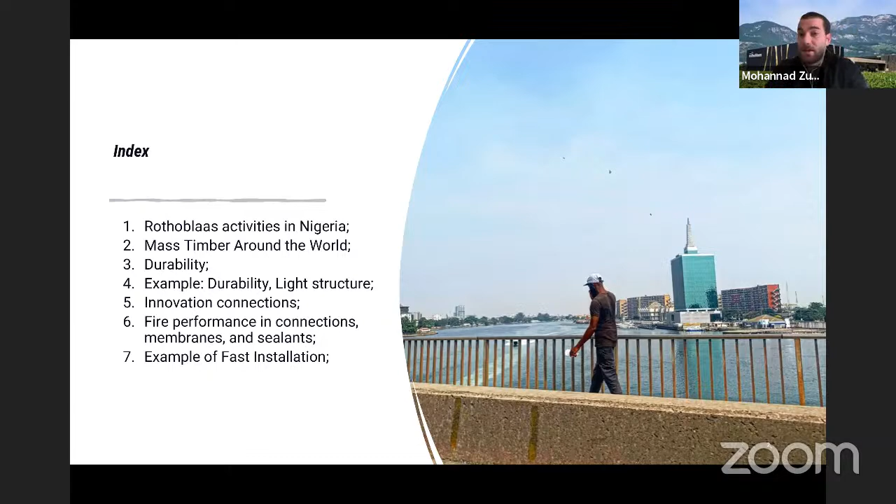First of all, we will go through Rothoblaas company and the activities that we are doing in Nigeria. Nigeria market for us is now a 2-year-old market. I have been in Nigeria 2 times, and I look forward to coming and visiting more during the coming months. Second, we'll talk about mass timber around the world, durability, and give some real examples regarding this durability topic in the hot climate or tropical climate region. Then we will mention a little bit about the connection and the fixation system, fire performance as well in connections, and sealants and membrane, with some examples, ones that are ongoing or done, or also according to our information, coming projects in Nigeria.

Starting with Rothoblaas company, it's a company with 33 years of working experience in the mass timber sector. We have worldwide subsidiaries. Our actions and our work is being close to the market. The last subsidiary we opened in Africa was last year in Morocco, and we are planning to open the next one in the UAE market. We have different locations with subsidiaries and warehouses as our strategy, being close to the market and supporting architects, engineers, and contractors.

33 years old, we develop, we don't only sell as a material, however, we do sell as well solutions, starting with machines and tools for carpenters, then implementing or including in our range fasteners, connections, membranes. In 2006, we went international, from Italy, where we are based, north of Italy, the Alps region, where the knowledge of mass timber technology started, and our developing was ongoing with the development of the sectors.

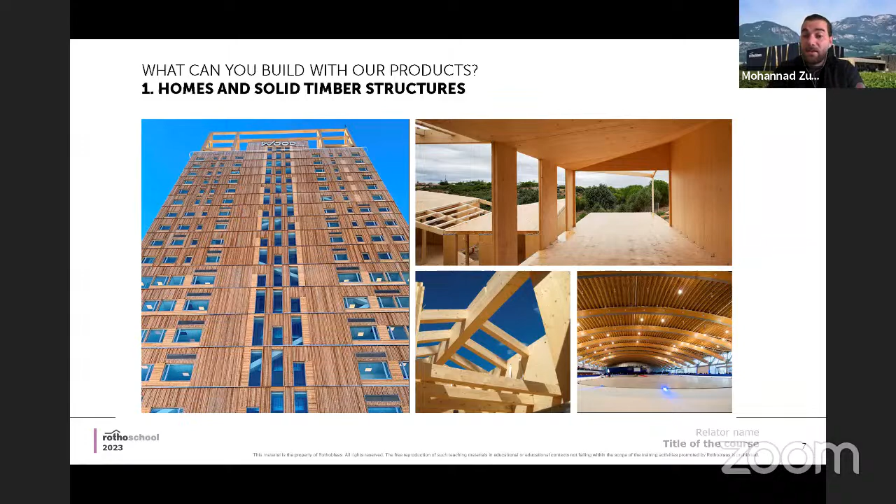Our products - mentioning that we don't sell the timber, we don't sell the glulam or the CLT. We collaborate with companies and engineers who build in CLT, and we support them, where you can find our materials in big buildings as well as in timber frame building systems, for example. And we have solutions for outdoor exterior, especially decking and cladding, pergolas, or related to timber work.

Currently, we are 300 salesmen worldwide. We look forward to be, in 2030, 600 salesmen, to be close to the customers and support them locally.

We do also promote mass timber, where we have a special line for educational purposes, which is called Rothoschool, where we make a lot of courses, even webinars, online, local in the market, or even we go to collaborate with universities. The last one was in Dubai last month, where we collaborated with a university and presented a course of 5-6 hours, and it was very successful.

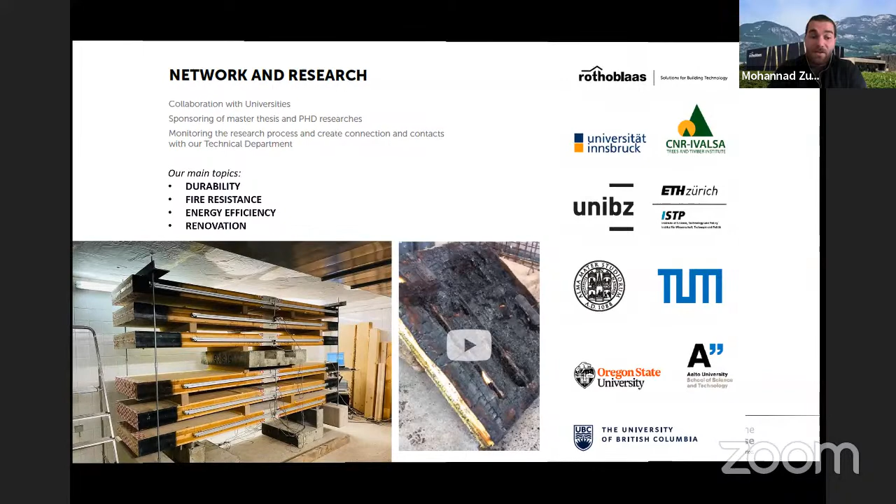As well with the research and university, main topics in mass timber, we talk about durability, fire resistance, energy, and renovations. Support, as I mentioned, we do support locally.

In case the customer needs help, we go to the construction site, we educate carpenters, we teach people how to use our materials, as well as we have a full team of engineers - 20 engineers just in the technical office in the headquarters, replying and answering questions from structural engineers, from architects, on what is the best way to use or to build in mass timber.

Talking about a different topic here, this is a very nice map where I always like to share it, where is the route of the CLT supplying worldwide, where we can see mainly coming from Europe and also North America, and it reached to the Far East Asia.

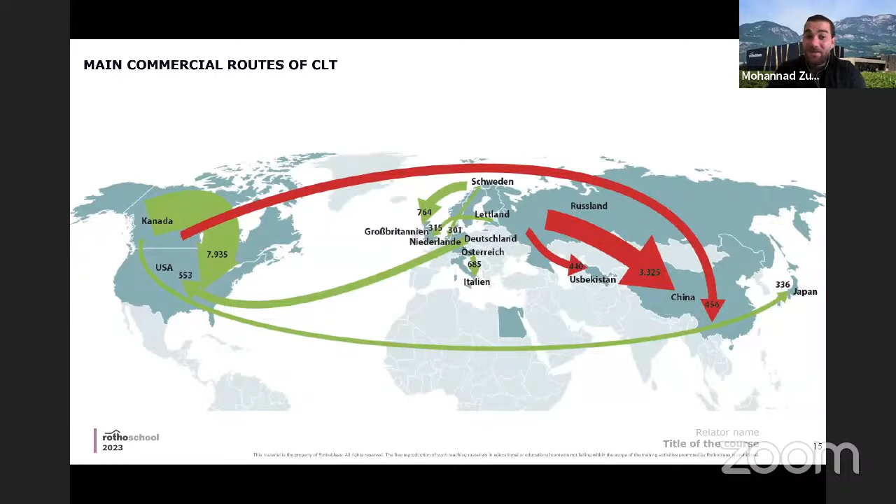From this map, I see this material is not passing Africa, which is currently the situation, unfortunately. However, this definitely will be changing.

Checking how close Nigeria, Lagos port is from Genoa here as an example - I was surprised it is 18 days, 20 days. However, where we did the projects in the Middle East, it used to take port to port 25 or 30 days for delivery.

So as well, seeing Nigeria's market is very close to where the material is, as well as knowing that currently Nigeria is working in forest management, this topic is something very interesting to consider.

The development of mass timber worldwide, especially after 2020, we see the exponential increment of using mass timber and implementing it as a building material alongside steel and concrete. So we do believe this sector will go further and further more as a percentage of use.

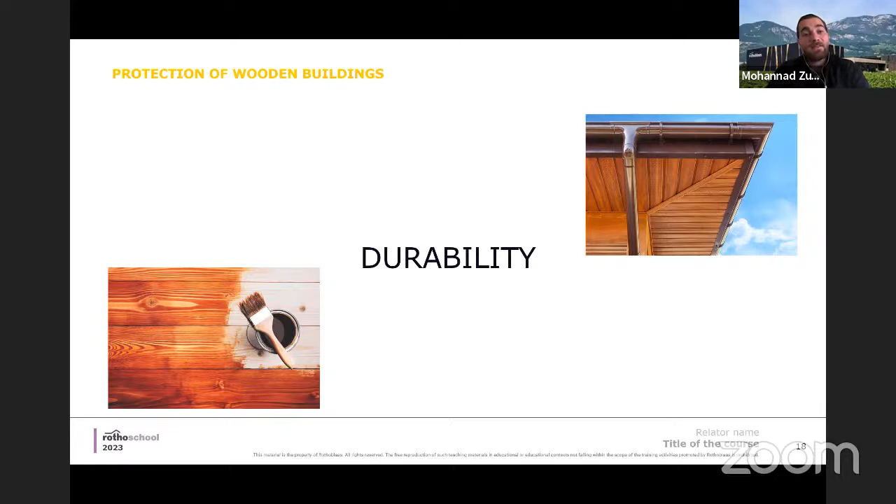Starting here with a topic that I would like to share as well, and the concern related to this topic: the durability of mass timber regarding hot climate weather, for example, that is material made. I hear a lot of feedback - this material can only be used in Europe, where is the snow, where is the rain. It is very hot weather, we cannot use timber.

Starting, I would like to begin with the principle of building physics - what things that we study during building, from the architect's point of view, which is the temperature, the air inside the building, the vapor generated. What is the temperature that a human being needs to feel comfortable sitting inside the building, which is, for example, from 20 to 27.

So there are many factors here that affect the building envelope, which are the external factors, as mentioned - temperature, wind, rain, water, vapor, or wood worms - and how we can protect our building, what material we need to use to make it more resistant and durable, as well as thermal comfort.

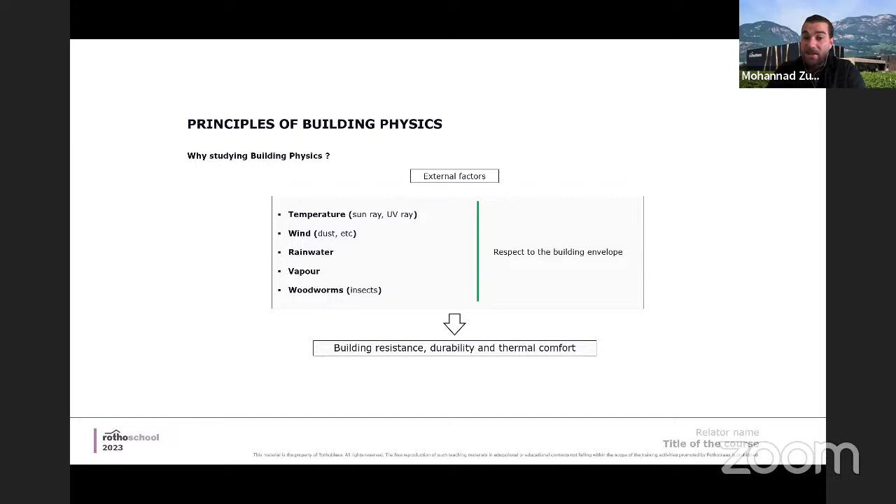Other things that are also considered, having all these environmental effects on the envelope of the building: our building is affected by superficial condensation and interstitial condensation. Both of them harm. The superficial condensation harms the health, especially during the winter, where mold starts in some corners of our room or around the windows, and you start smelling gases that will affect our health. And the one that is related to the structure we don't see, unfortunately, and how we should consider it during the design phase.

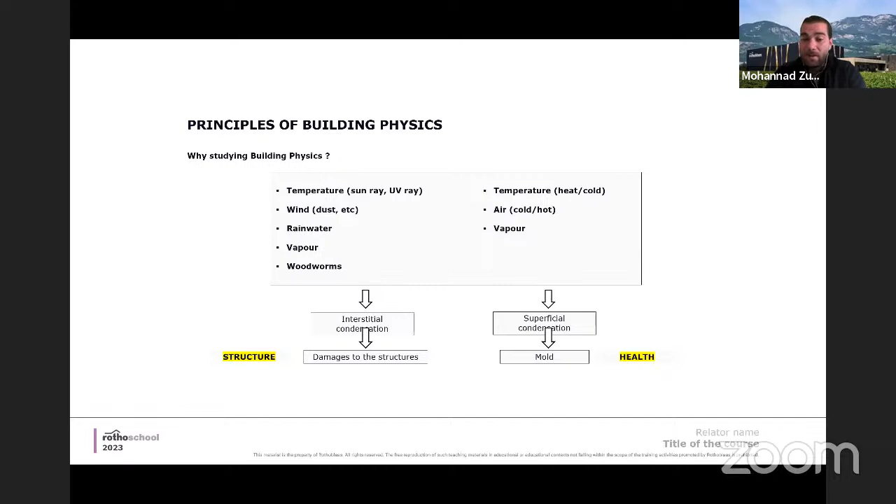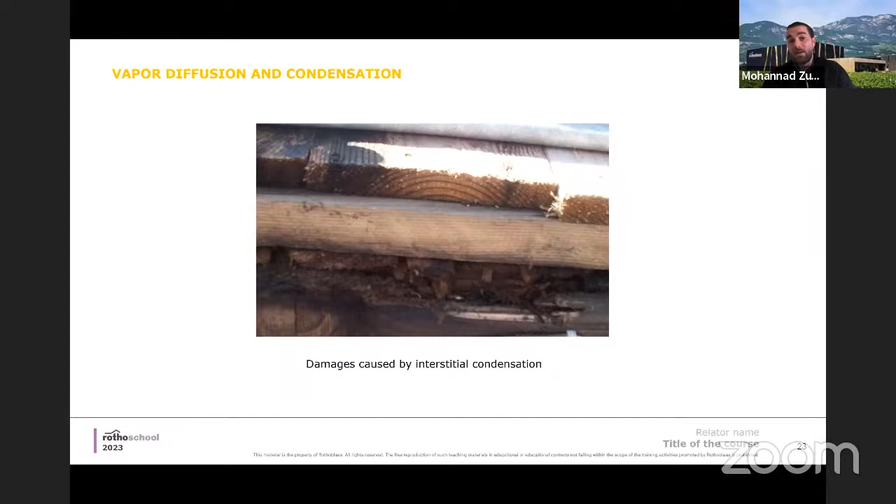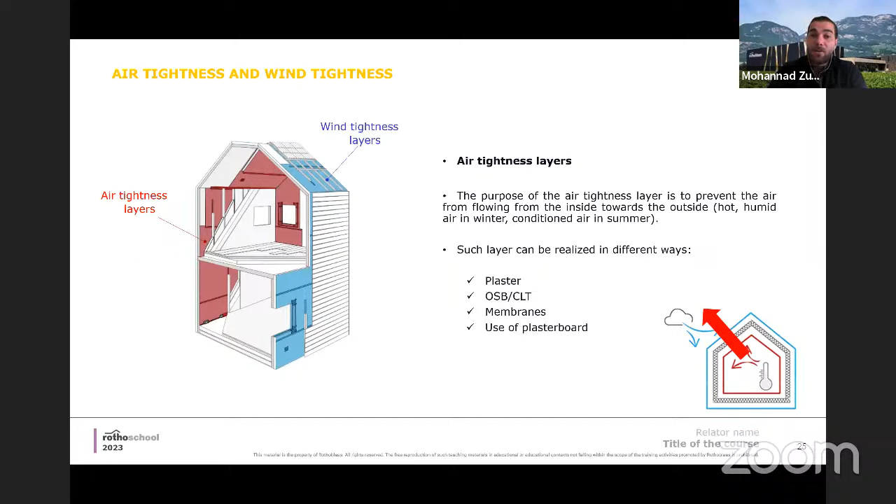When we are talking about tightness, here we talk about airtightness layers as well as the wind tightness layer. Both of them are important, differing with the location where we build. For example, if we build in Europe where there is a lot of snow, we need to make more consideration for certain layers. If we are building in a tropical or warm area, different layers could be considered. However, it is very important that we don't allow the vapor to go from inside into our structures, and at the same time allow it to go out of our structure.

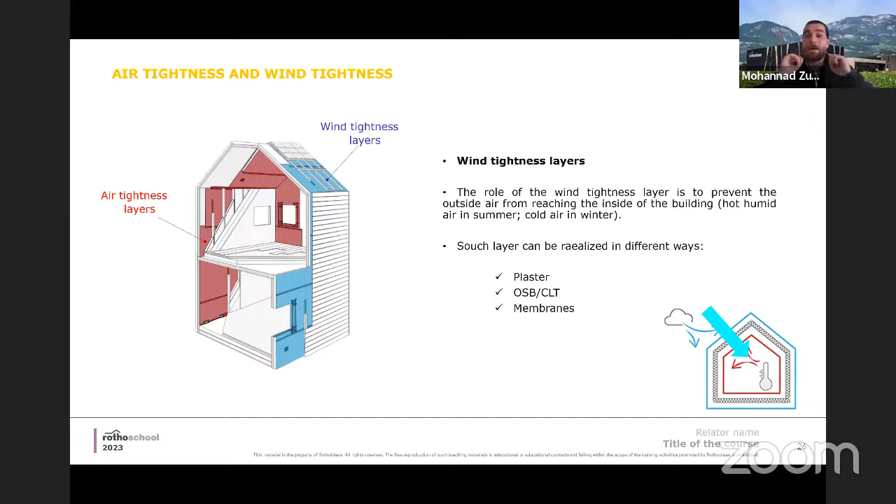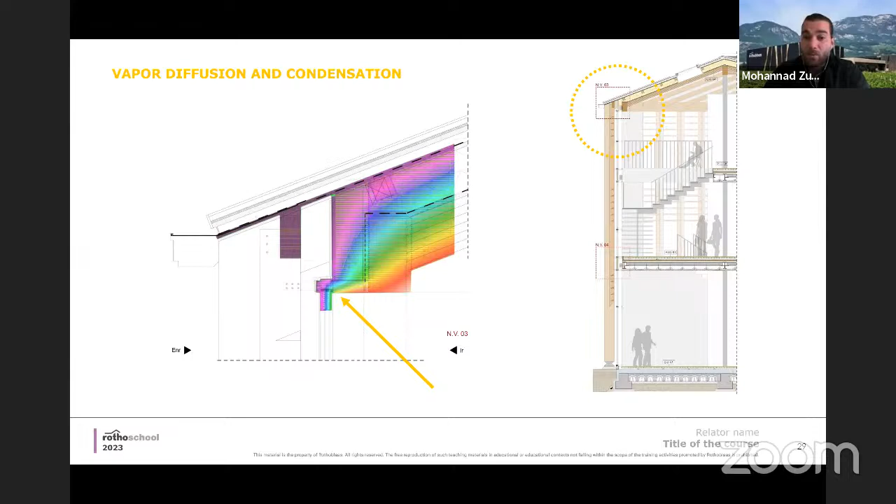On the other hand, wind tightness: we don't want to be sitting inside the room and feel the air leakage going around, and the vapor diffusion and condensation happening during the building life are important to consider. Here, an example of a bridge: small corners for the windows and doors, or with the slabs, the small details also need to be considered. How do we make sure our building is correctly airtight and wind-tight?

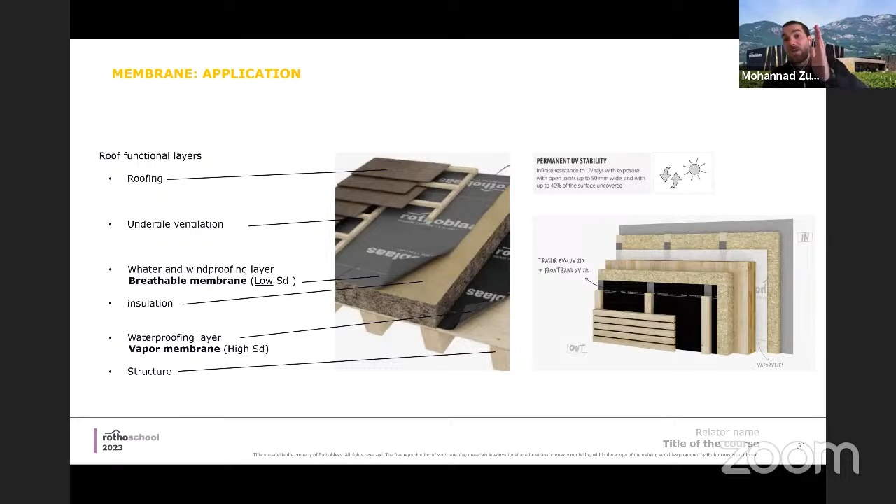There are two different types of membrane that we propose, the microporous membrane and the monolithic membrane, and each one has a specification depending on the application and the timing of installation. Is it for the wall? Is it for the roof? These small details are also very important to consider. Here is an example of roofing material. We put a breathable membrane outside with a gap, for example, of 5 or 8 centimeters to allow ventilation. For our roof and walls it is important to have ventilation, as well as a membrane to allow the vapor to leave our structures.

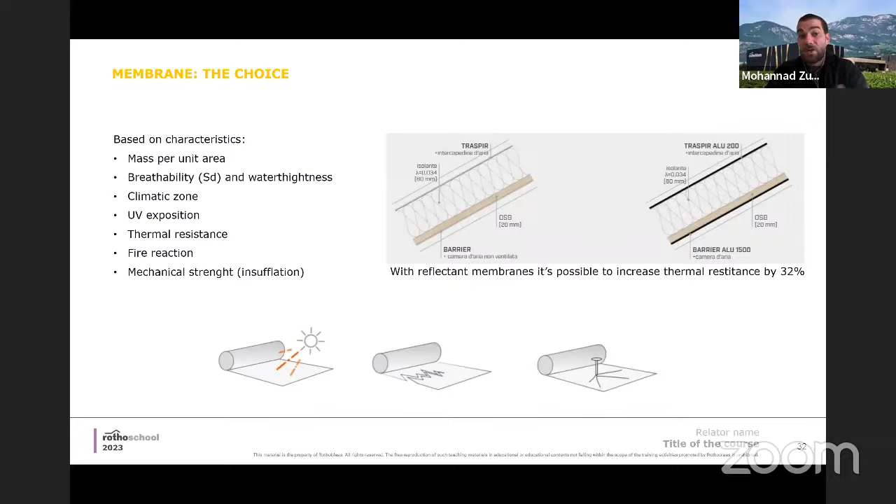Also important to consider is the mass per unit area, the climate zone, the UV exposure, for example, how long my membrane will be exposed outside before I cover it. Do I have a fire requirement? Then I need to use a certain type of membrane that we will see after. There is a wide range of materials that can be considered. It depends on the architect's specifications and requirements, and each one has its application and location.

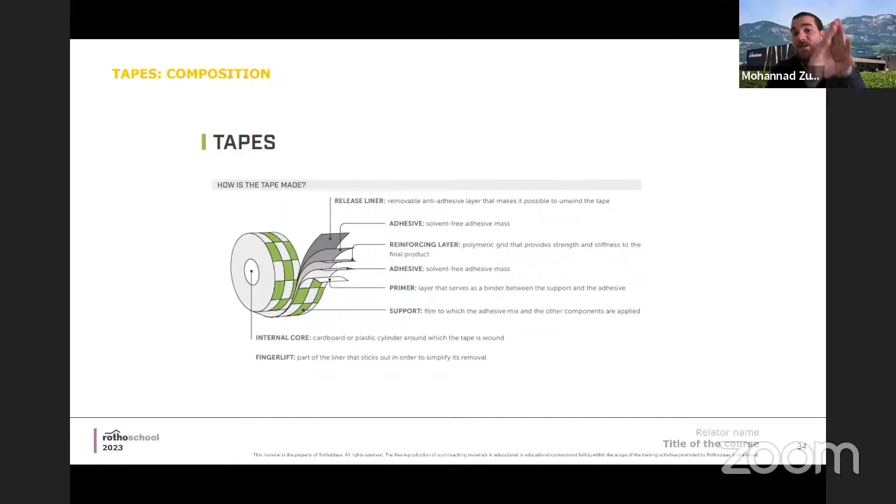Talking about membranes as well, we need a tape to join the membrane, to close the gap. The thing is, in mass timber, we put wood on wood, and there will always be a gap for air leakage. So how do we seal this connection or joint? We also need to consider the type of tape, the viscosity, the cohesion with the structure, the adhesive, and the stability over time. All this is to be considered, the durability as well.

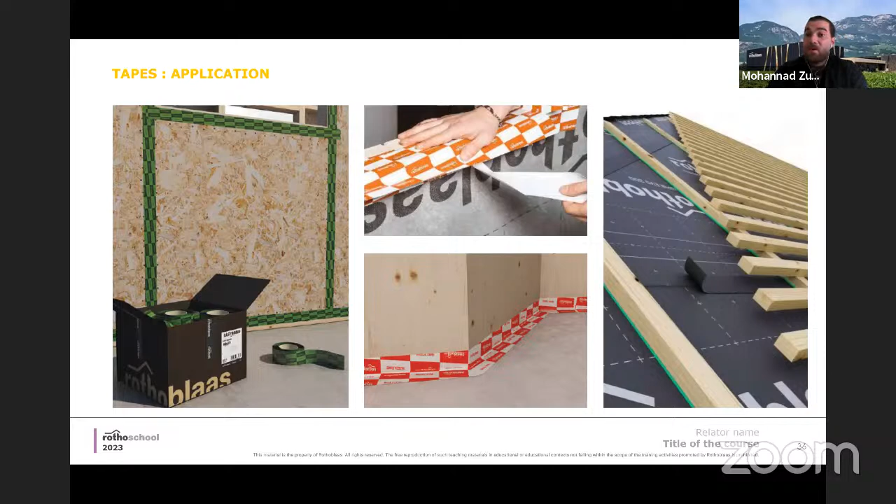This is an example when we are talking about mass timber. It's not only structural; it's very important to protect the structure of the mass timber, and there are materials that allow you to protect it and keep your structure durable for the design lifetime. Types of sealants for closing joints and openings.

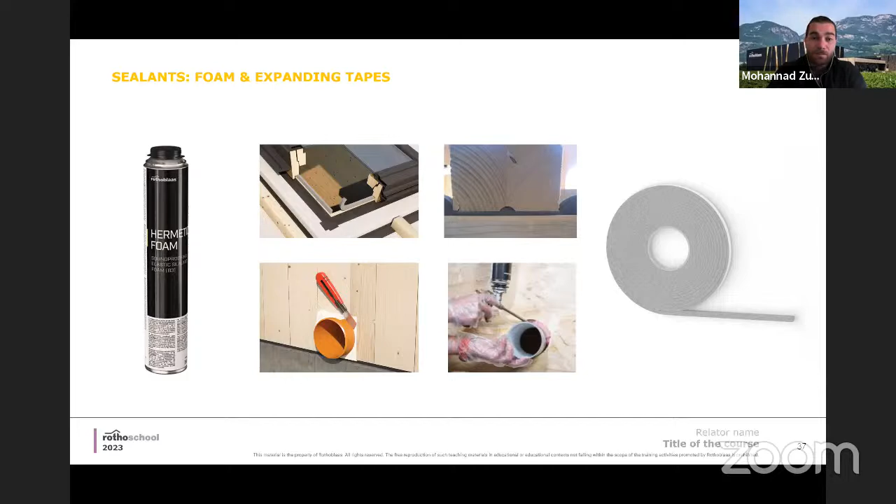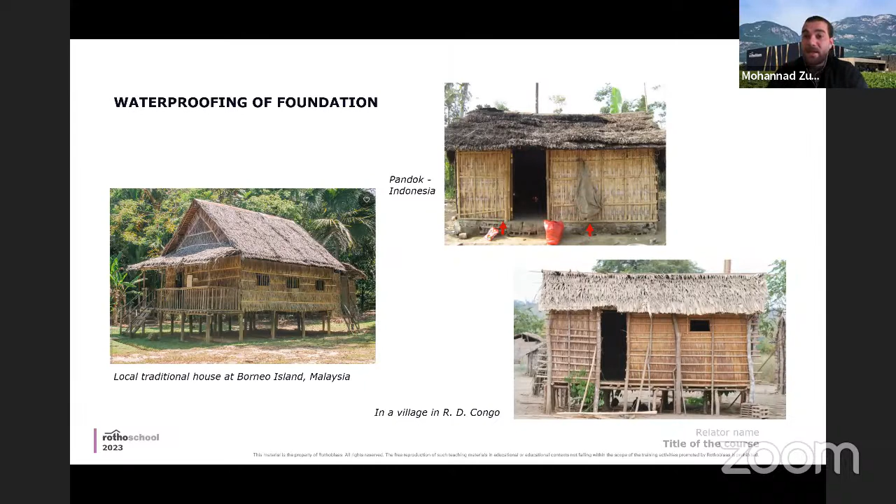One of the important topics is the capillarity of the water. So how to avoid capillarity when we put our timber on the concrete? In the past, we see people knew it and they were using it by increasing the height of the building where they live from the ground because of the water.

And currently we have other solutions now, which is membranes that can protect your buildings from the foundation. And it doesn't allow the water to go inside the wood. So you avoid the condensation, and you avoid the mold that would be created in your structures.

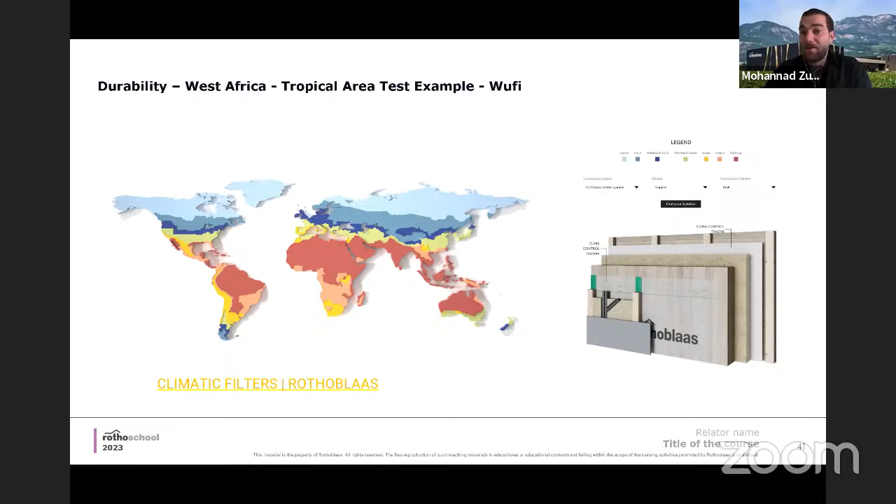Here is a very interesting test that we did with a software called WUFI, where we study the stratigraphy of a wall in Nigeria, in a tropical area. So the concern is that timber is not for warm weather, it doesn't work in a hot climate. With this example, we will see that it is fit and made to be built in warm climate.

We did this stratigraphy on the software. We put the render outside. We put insulation, as well as 10 centimeters of CLT. You will be surprised, firstly, about the U value achieved with this section of wall, 30 centimeters. We are able to achieve a 0.2 U value.

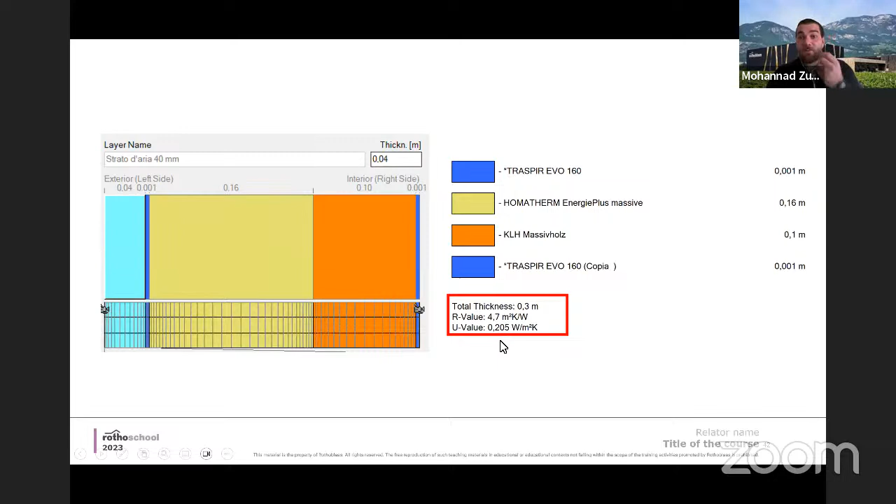If you want to achieve 0.2 in concrete, for example, or in a steel structure, what would be the section of the insulation? What would be the section of the wall? So here it's evidence. It is a light structure. It is smaller sizes in terms of structures.

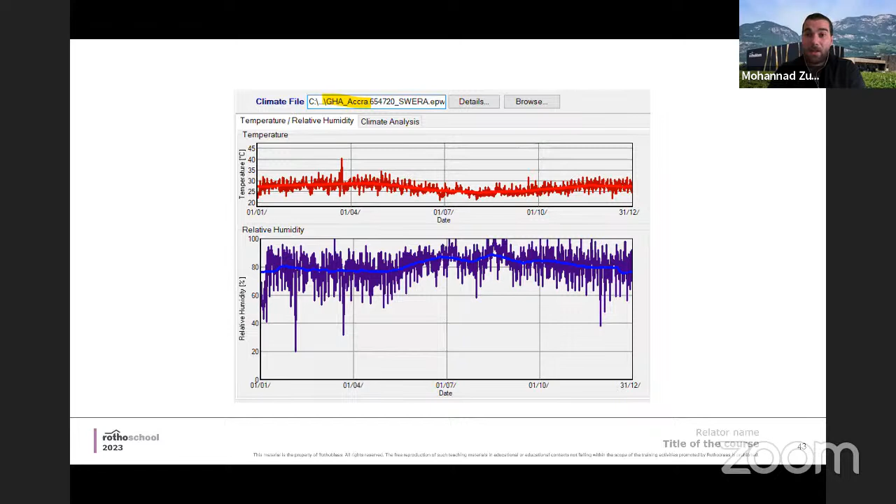We didn't find Lagos as a region. The closest area was Accra, Ghana, considering the temperature and the humidity, which is considered very high, as well as in Nigeria, where I was. There is a humid weather, especially in Lagos. More or less, West Africa has the same tropical climate.

And we can see here, during the coming years, the percentage of moisture content inside the CLT, which is between 11 and 12%. That made it perfect for the weather. The concern is when we have a lot of snow, a lot of rain. Here we start covering our material more, putting more sealants, more membranes, very

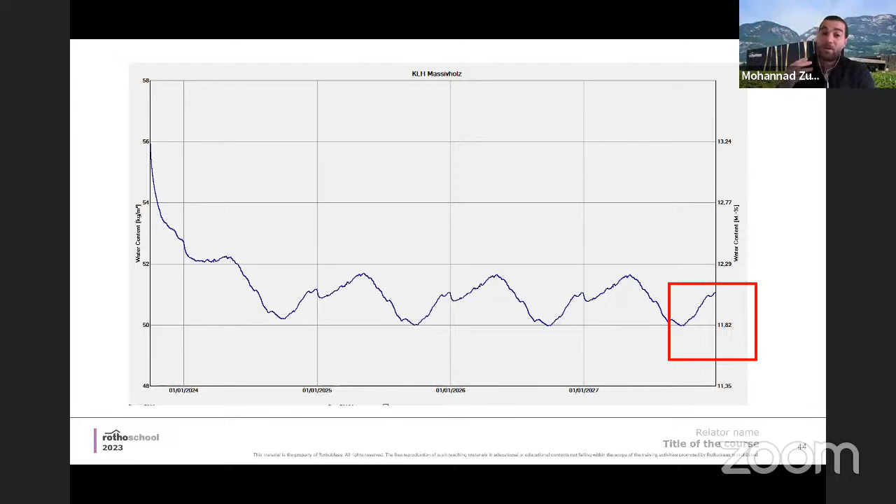expensive membranes. But with the weather we have in Nigeria or in West Africa, and the same result in the Middle East, it's very clear that the moisture content of the wood will not pass, if the detail was made correctly, a very high percentage, let's say 20 or 22, for a very long time. Our weather is humid, but still it is a dry weather.

How to consider the sealant with the fixation system as well. This is a real example here, when we use the hold down and fixation system. For this topic, I would like also to share a real example of durability and light structure, for one project done in Qatar in 2006, where I worked as a technical engineer.

It is over-water buildings. All the buildings were installed on piles. The advantage of this was a light structure, a much smaller number of piles needed to build it at the time. There are bungalows and big restaurants with decking all over water.

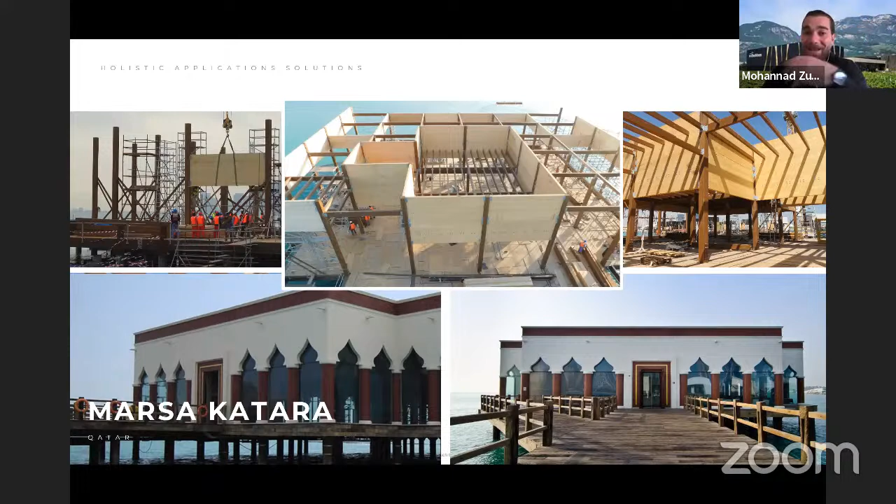So we were worried at the time what the humidity would be. We put insulation and bitumen everywhere in order to protect the wood. The knowledge at the time was not really high in terms of the performance of the buildings. However, our customer is doing the annual inspection, and the moisture content of the wood over water was 11, 10, 12.

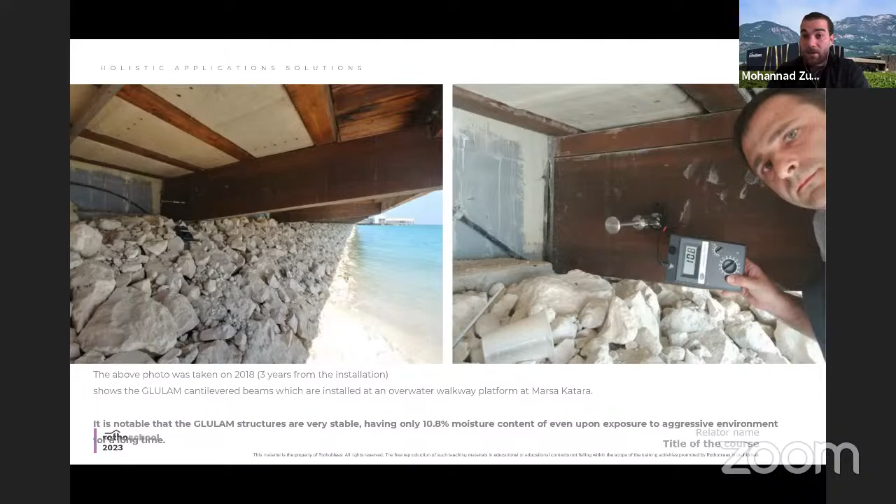I was imagining what maintenance will be needed after, how to maintain this steel structure over water. So using glulam above water was a very successful solution compared to other materials.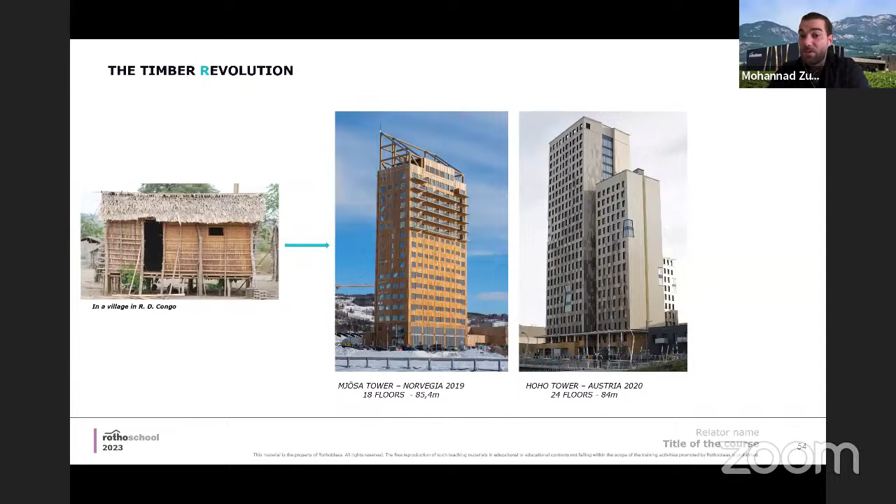Here, another topic that I would like to mention now is the fixation systems. We know how to design. We talk about timber, fire, the handling, logistics, but how to fix the material, how to fix the timber together, how to build a multi-story building with timber? Type of structure here, whether we are talking about heavy timber frame buildings or timber wall buildings, as other speakers were mentioning, having a lot of references in this topic.

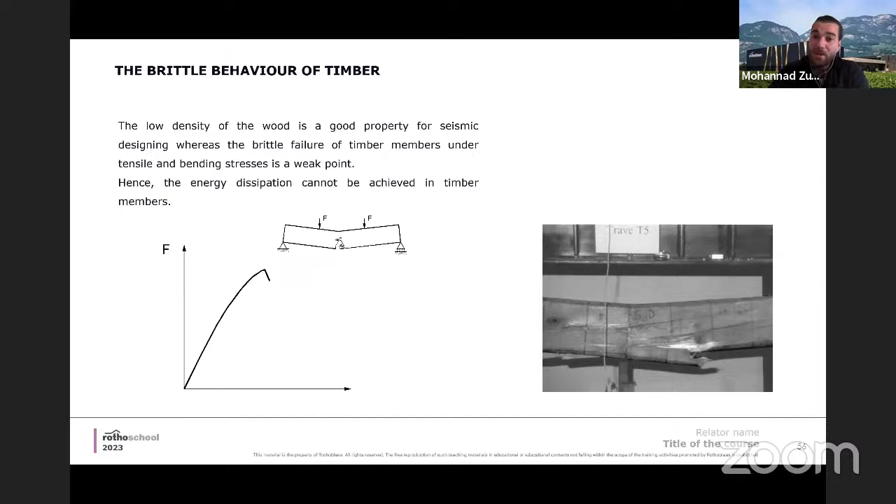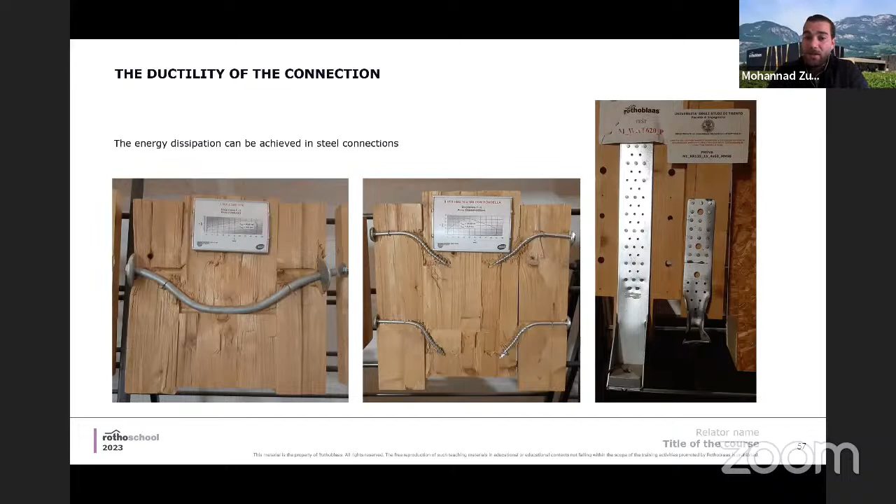Here I would like to highlight that timber is a brittle material, and the building needs ductility, and the way of bringing ductility to your building when you build in timber is through the fixation system, through the screws, through the connections. Doing different tests and seeing how ductile the joints and connections need to be. Collaboration with universities and research and development institutions.

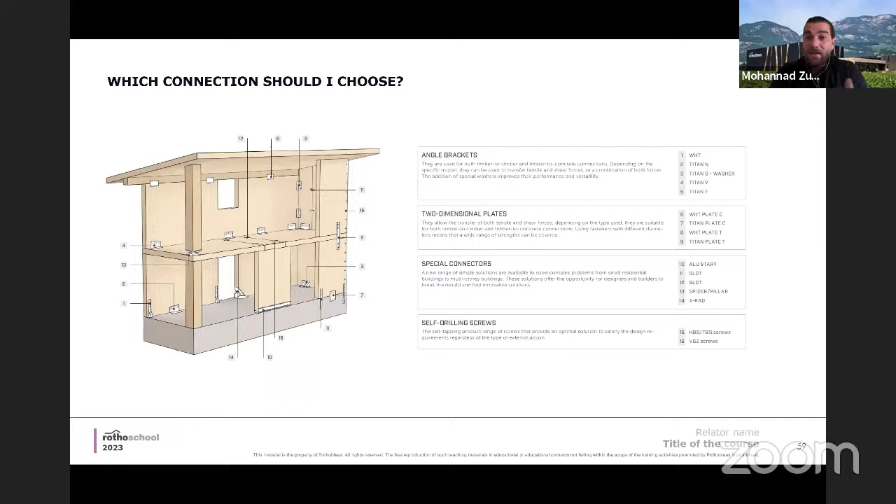Things to be considered as well by the designer are the horizontal forces, the wind and earthquake. Okay, you have X wind load, you have this amount of earthquake. How should you design your building, where to put your angle brackets, what is the application of each different angle bracket to be used. There are various options depending on the applications.

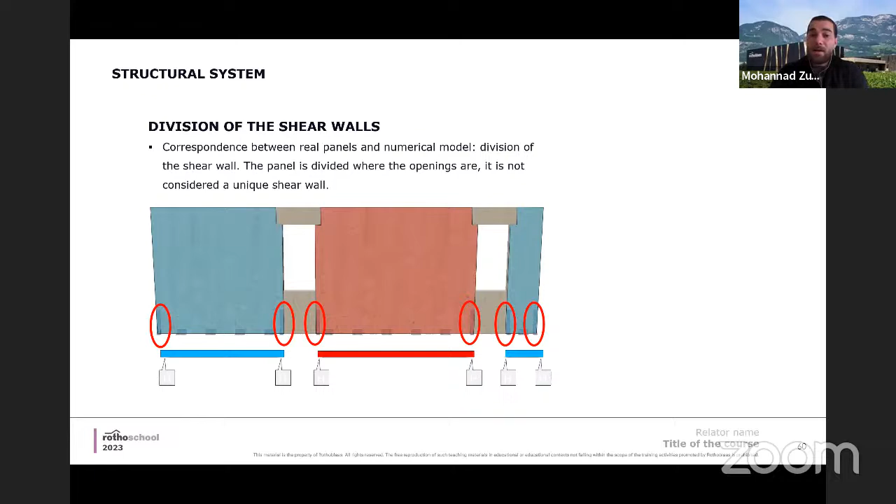Here is an example, which is very important: the wall arriving in a container, because of the limitation of 2.5 or 4 meters, and we need to join our wall to make it act and perform as one piece to resist the wind load. There are brackets especially to verify the traction load, the wind load or the earthquake load, as well as brackets to resist the shear force.

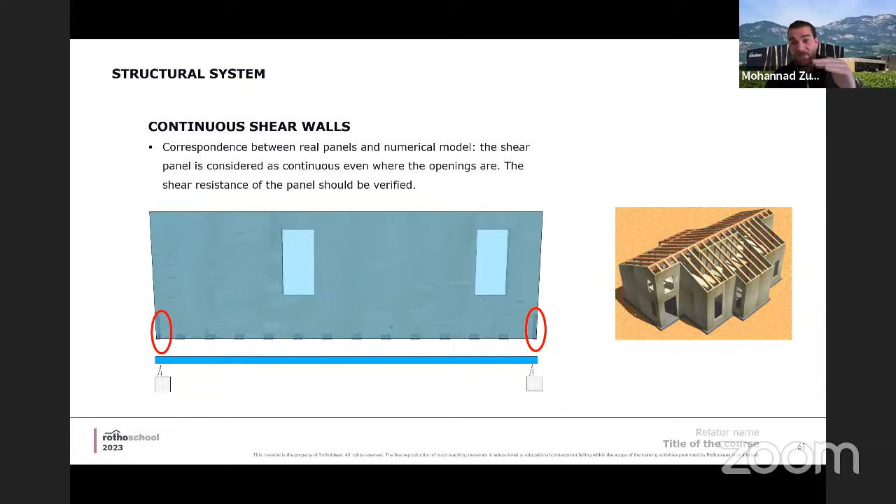With these brackets and their specifications, different sizes, different shapes, with the specification of how many kilonewtons, the structural engineer can easily consider: okay, we have this piece of wall, we need 2 hold-downs, we need 4 or 5 shear brackets, and he can make the verification easily according, for example, to the Eurocode.

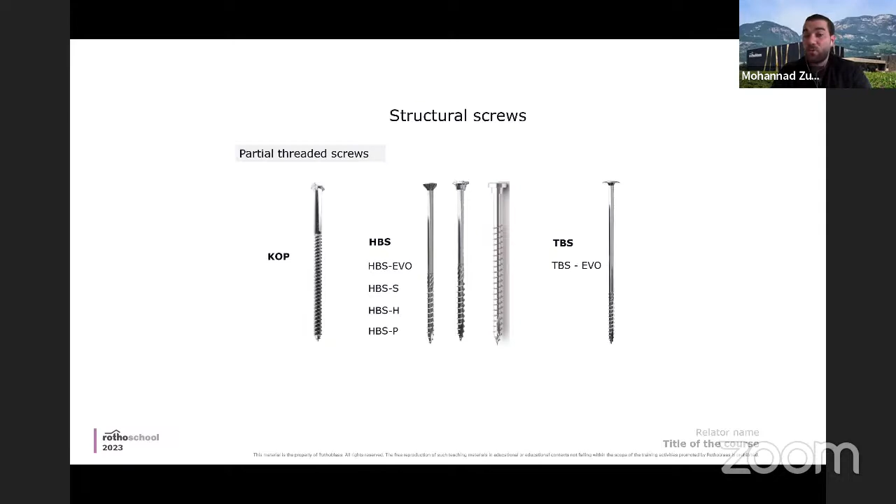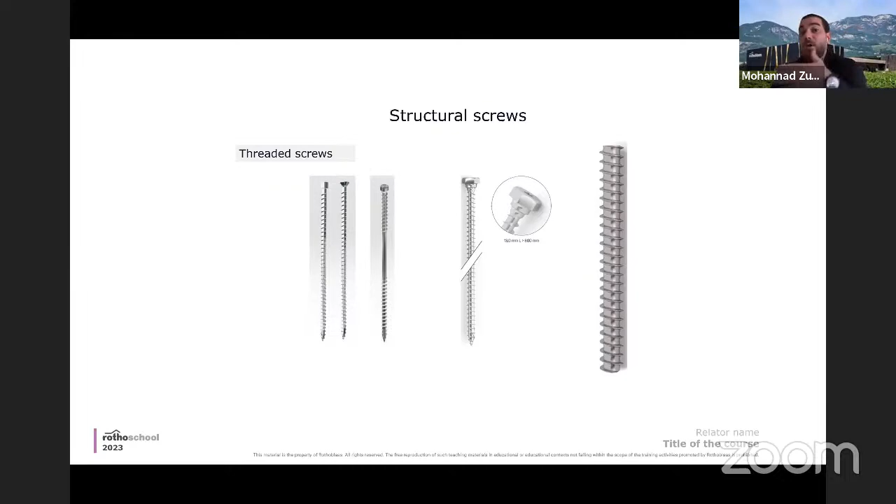Something else besides the brackets is the screws. There are 2 types of screws: fully threaded and partially threaded screws. Screws to fix timber to timber, steel to timber, or panel to timber. How to add ductility in my wall? For example, if I need a ductile joint, I could use the partially threaded screw in this location with these distances, which gives me the ductility. If I want a rigid connection, then I go to a fully threaded screw and apply it, for example, at 45 degrees to make the connection rigid. And this can easily be decided during the calculations.

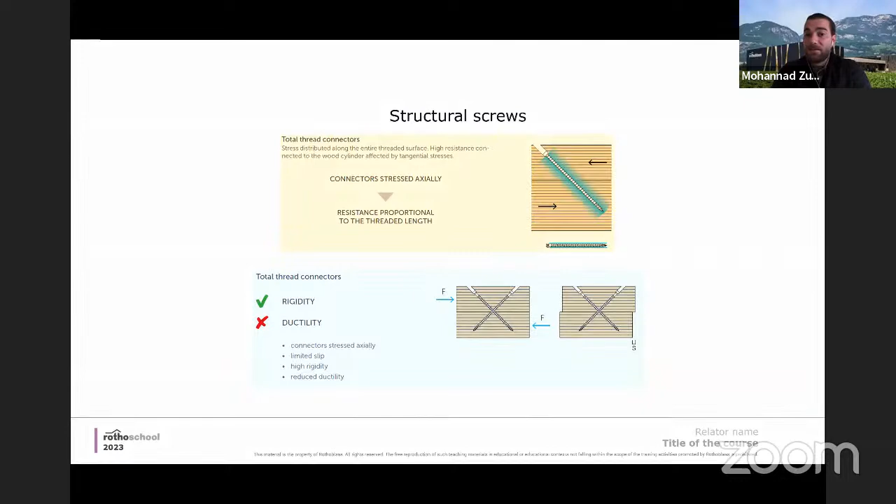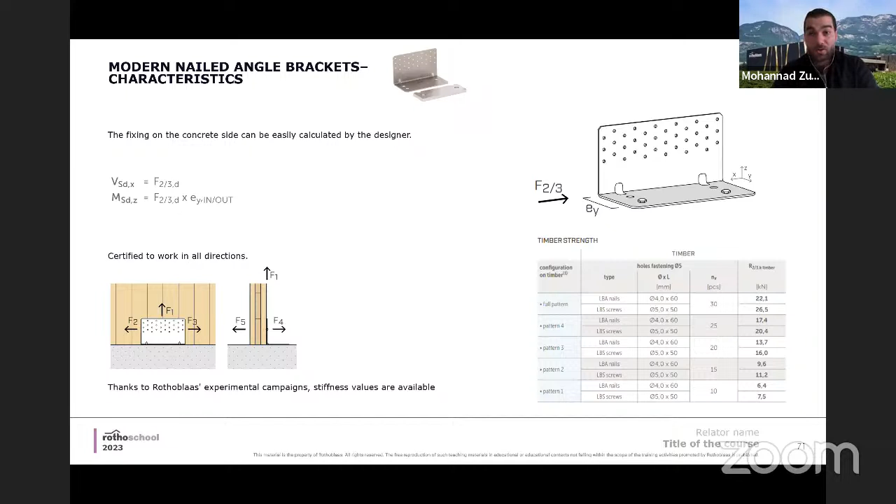Different ways of fixation, depending on what the engineer decides, rigid or ductile connections. Angle brackets to resist the shear load and the traction forces. From our catalog you can easily pick how many nails, how many screws, and the characteristic value that our brackets can resist, all provided with ETA certificates. Here an example: big brackets fixed with steel big-head screws that connect steel with timber, with sealants around for airtightness.

Here I would also like to mention the hybrid structure. Moving in the market, talking with companies, engineers and especially contractors who build in concrete and steel, it's like, hey, Mohannad, do you want to close our business? Do you want to replace concrete with timber? They stop listening. They thought we are bringing something new to the market. However, that's not the situation.

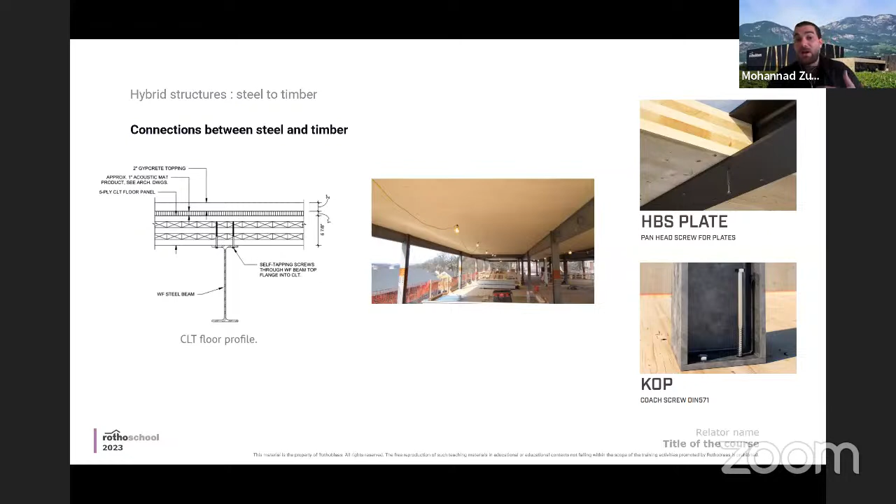Timber construction or mass timber is not to replace steel and concrete. Steel will be there, concrete will be there. It's only about having the advantages of mass timber, mixing it or using it with the steel structure, and making a hybrid structure. So you take advantage of the mass timber, the steel structure, as well as the concrete structure. And there are solutions for how to fix each element with the different materials.

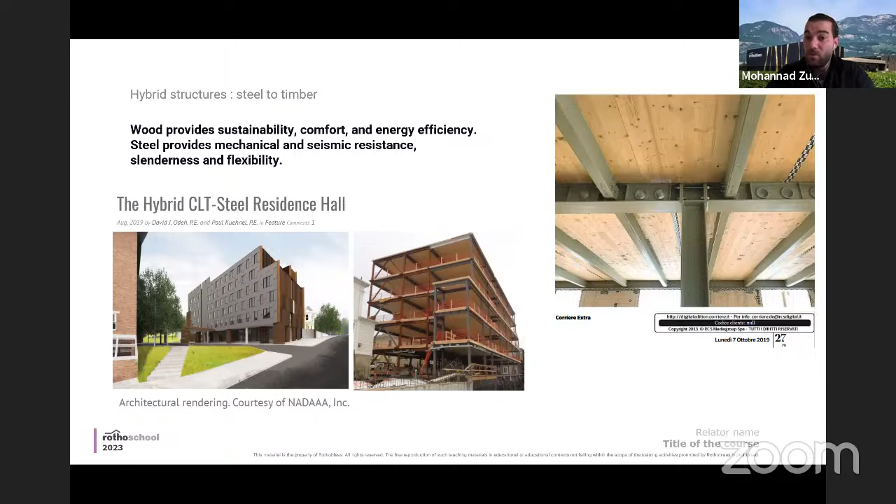So the movement I see recently in the market is more toward the hybrid structure. The steel is good, concrete is good, but how to mix them together, how to take advantage of the timber. Here, Rothoblaas started developing a special screw fixation to fix the timber with the steel, as well as concrete with the steel.

When we start talking about a multi-story building, we found out there is a problem, which is the punching shear for the high load of the column inside the CLT slab. So what is the solution for this? We developed a product called a spider, where you can connect the glulam column with the CLT slab for different story buildings, or even connect with a steel structure. It is basically the same concept.

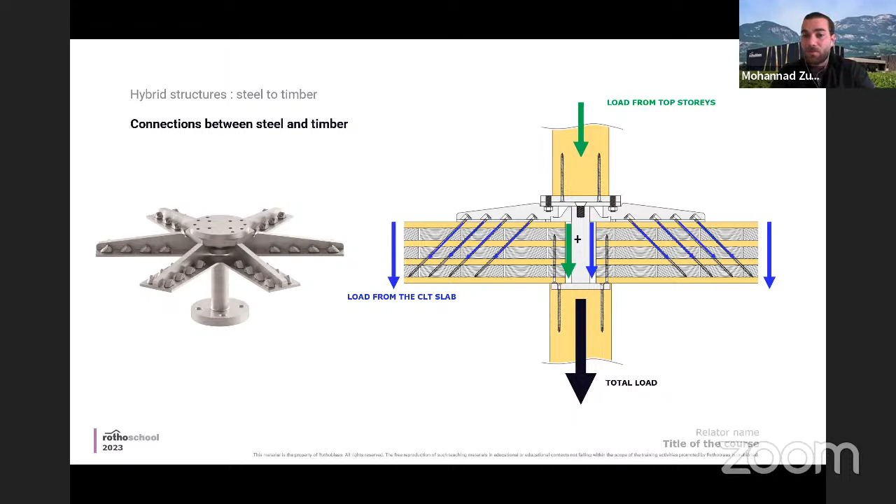It is to transfer the high load directly to the ground through the column, and not putting the whole load in the slab. Similar concept for a concrete structure, where they increase the reinforcement around the columns. Here we have this spider that transfers the load directly from top to down and allows you to build multi-story buildings.

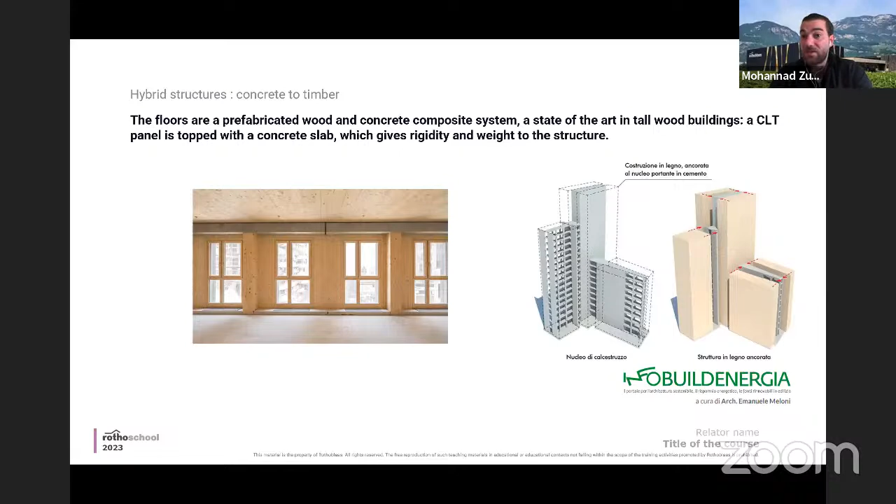Also, using concrete, which we see a lot, that is concrete for resisting the horizontal load, and they make all over the CLT, for example, slabs. So in this case, taking advantage, reducing the weight of the buildings. Yes, it can work.

You can cast concrete. One of the topics is, what is the finishing for the buildings? The finishing can be whatever you want. Do you want tiles? Do you want parquet? Do you want gypsum board? You have the option to have the finishing that you prefer, because there are solutions for how to joint

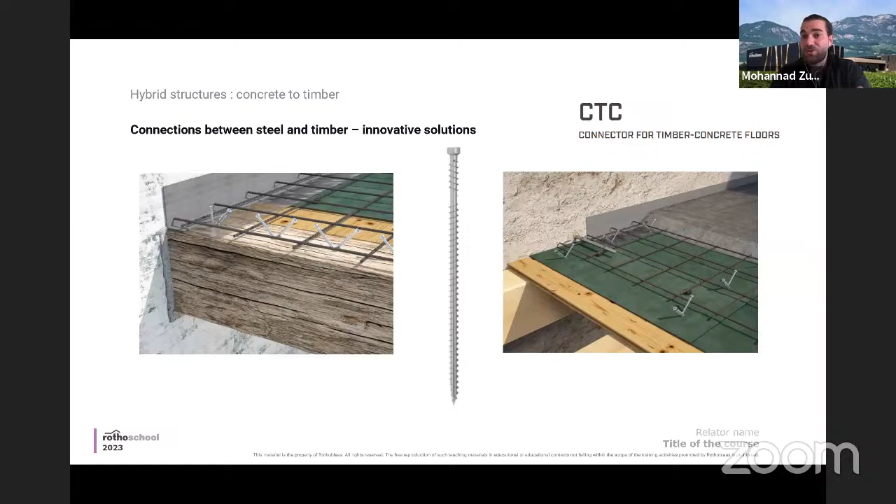Also, if time allows me, the fire performance is a concern. Always when we're talking about mass timber construction, one of the main topics is the fire requirement. What is the fire requirement? It depends on the building type. Is it a hospital, is it a school, is it private, is it a house? This is something to be decided by the authorities. The structural engineer cannot decide it during the design phase.

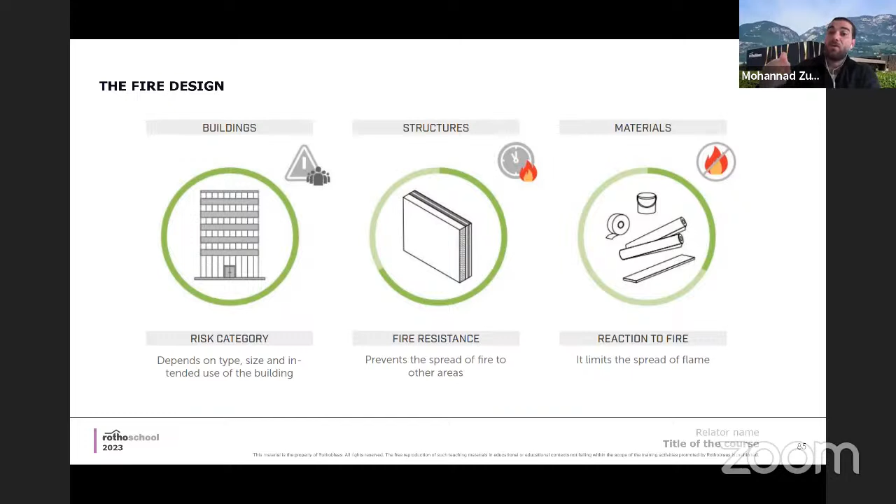What is the structural fire resistance for the structure? But what comes after is important as well as the structural fire resistance: the material that we are going to use with our building. Here is an example. I like these photos because the wood is still there. It did not collapse. Yes, the fire ate the glulam, but still it is standing and it did not collapse. The joints, I mean the fixation systems, appear.

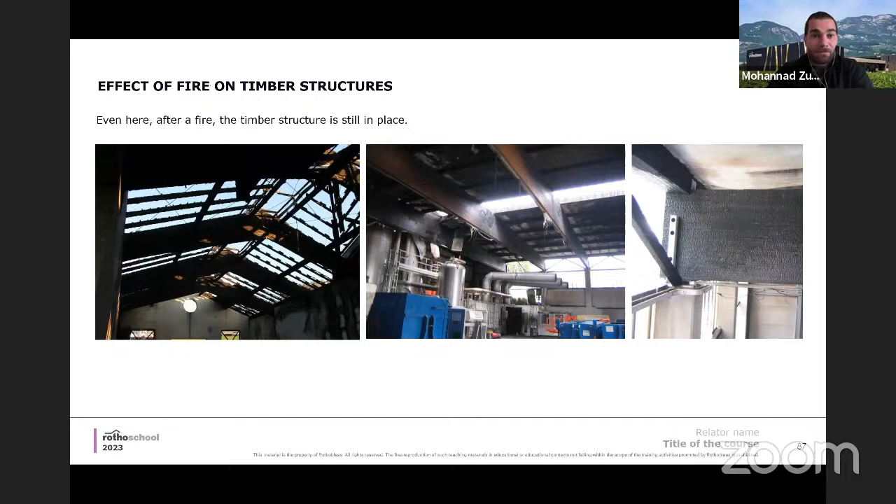Another example as well of fire for a timber structure, where the building is still in place. Here are things to consider. Sometimes an engineer asks the architects, when you want to increase the fire resistance for your steel beam, for example, do you sometimes cover it with a wood panel? They say yes, sometimes to increase the fire resistance for my steel, I cover it with wood.

So the wood itself has a fire performance and resistance, which can be calculated. Like I need 30 minutes, I need 60 minutes, I need 90 minutes. I can decide it during my design. This is an example. I was driving somewhere near the market, where I saw a steel building, a market, collapse in a very sad way, and I thought, what would it be if this was built in timber?

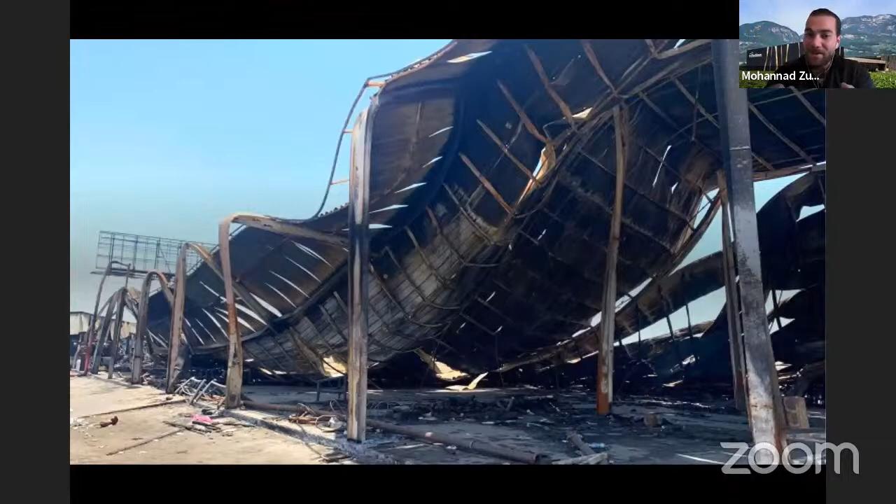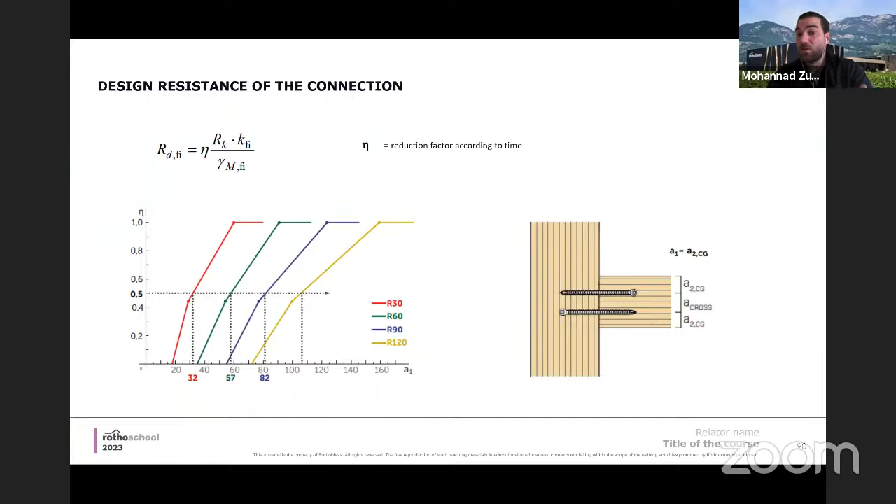The behavior here is clearly a steel structure, a ductile material. When it collapses, the other parts of the building follow. It is a different behavior of collapsing, I would say, with a mass timber fixation system. What do we consider when we have a fire requirement? Very simple. We increase the section of the beam. We increase the section of the CLT. We make sure that our connections are embedded inside the timber.

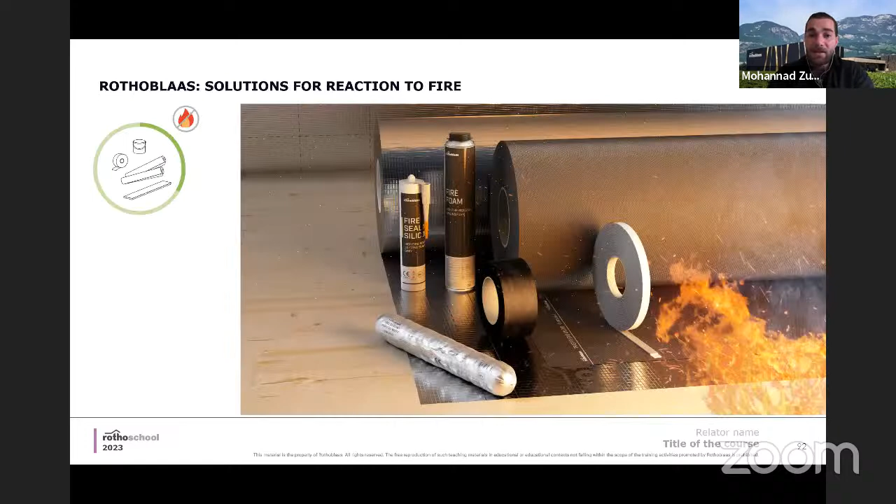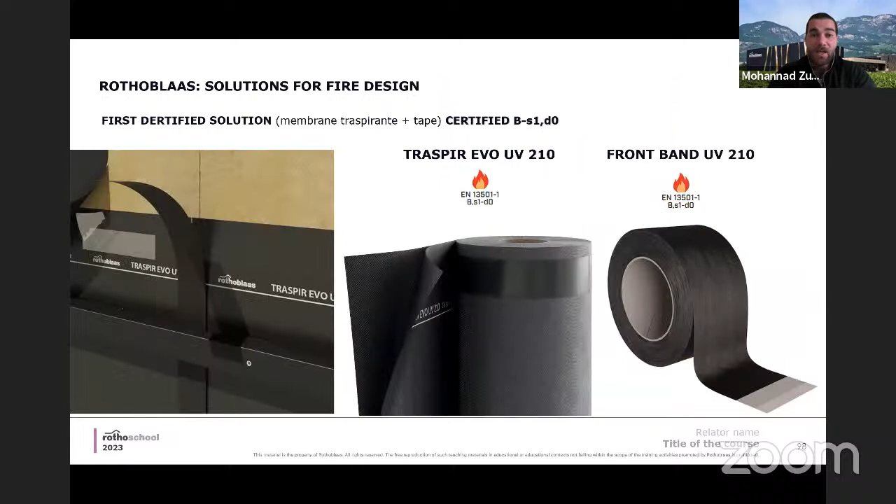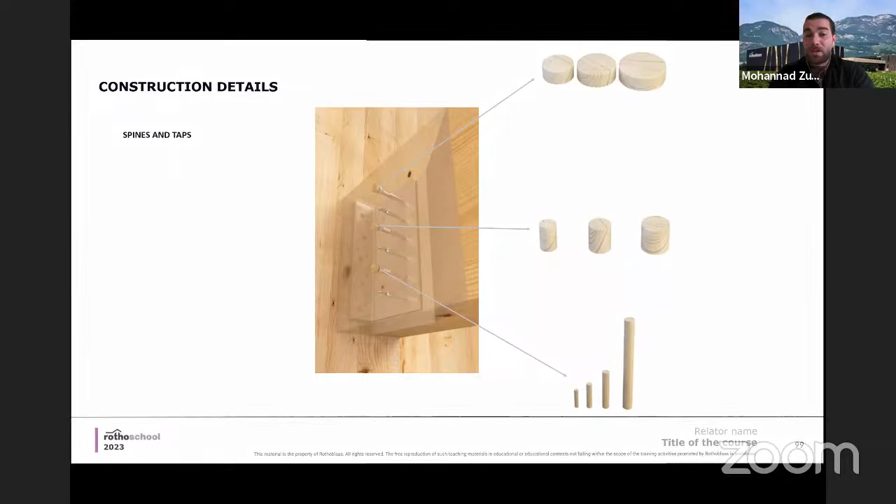Different materials as well for membranes and sealants, barriers if we have fire requirements. Certified breathable membranes as well if we have fire requirements, covering the connections, hiding them inside the wood, foams, special foams, as well as membranes. To this level, sometimes it's needed to cover the screw head, for example, in order to prevent the fire from reaching the connection. Here, I'm almost done.

An example of fast installation. It was before the World Cup, in 3 months. It was July when containers started arriving, and the customer needed to finish it before the World Cup. The date was October 2022 to deliver everything.

There were many villas, a spa, and a cafe that needed to be built, all in timber construction. I was inside when the containers started arriving, and the speed of installation was surprising. To be honest, it was like, wow, the container arrived the same day, and the next day it is in the location where it has to be. And the next container is coming, the same thing

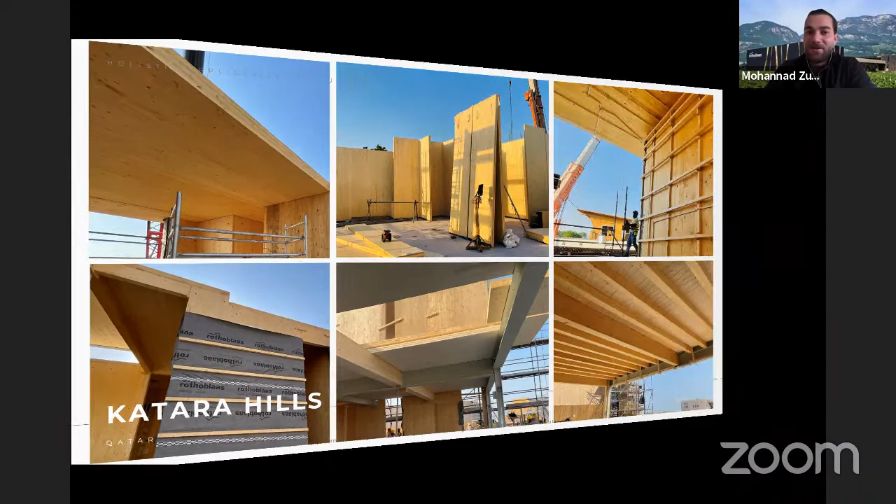is installed. Finishing inside: when we talk about timber construction, people ask, will I see the timber? No, you will not. You can see the timber, but most of the time they close it with gypsum board.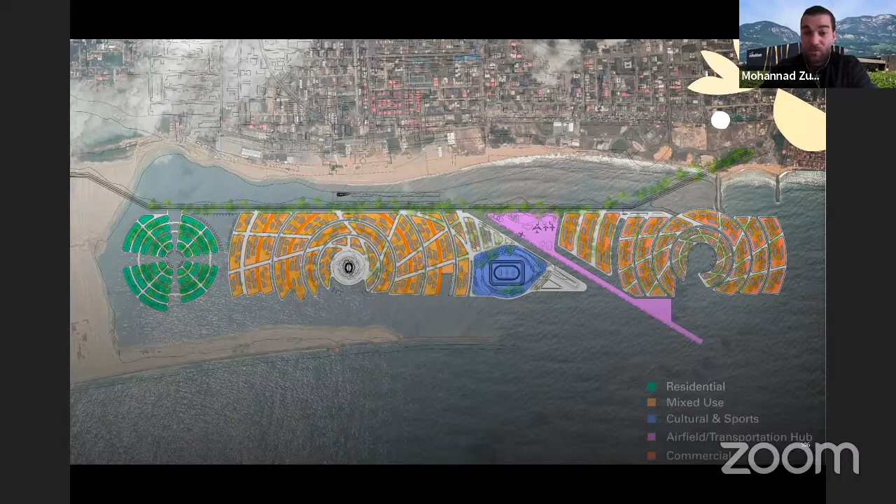There are residential spaces, a sport stadium. It's very interesting to implement at least the mass timber because of its advantages. I would say fast installation, a light structure, easy to deliver. I once met an architect who goes there by boat every day to build or to have meetings there. So in this part of Lagos, it's very interesting to use mass timber,

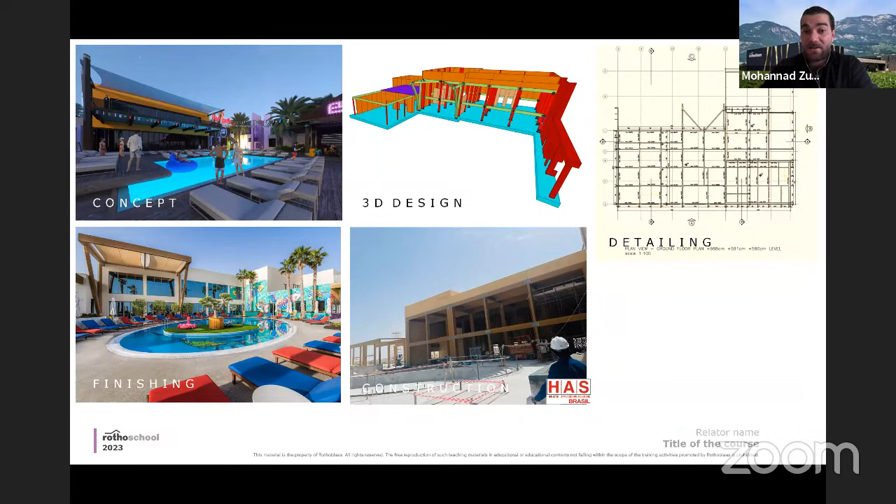where here also there was fast installation, showing the rendering, the design, the drawing, and the real construction site, in almost the same situation as where Ocean City is. Here also inside the building, this is me talking to my technical engineer reference in Rothoblaas, having a consultation inside about the slope of the rooftop and what type of material.

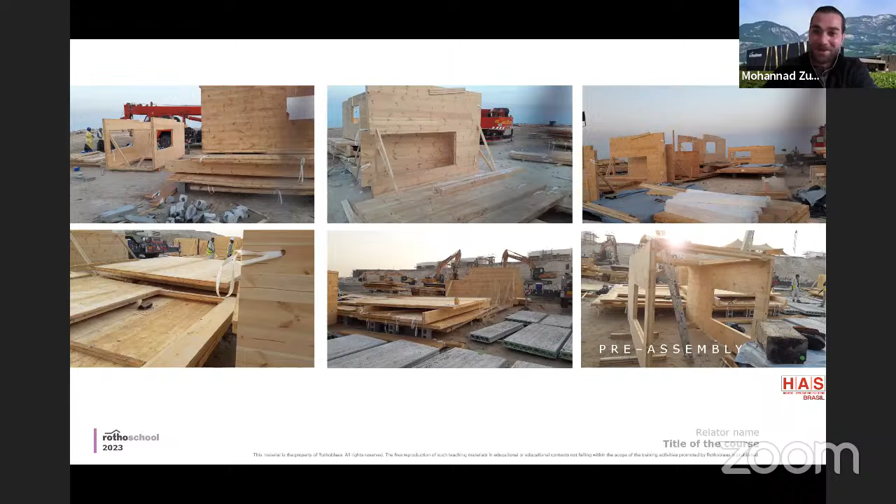Here are very interesting photos where, surprisingly, the material arrived and the foundation was not ready. So there was a solution where the guys started pre-assembling near the foundation and easily installed the buildings. Currently in the Middle East, you may have heard about the Red Sea development, a lot of timber buildings over the sea or near the sea, where they should not cast or put a lot of concrete.

Another example: when I was reading about this project, Ocean City, I saw the stadium there, and I directly remembered the stadium in the UK which looks almost the same. It was the first football stadium built in timber and glulam.

So there are many projects, I believe, in Nigeria that can take advantage of mass timber and implement it in the market. For architects, who can make their designs, for structural engineers, who can make their calculations and verifications, as well as for the developer, who can consider the lifetime of their building. It's not only building it and selling or renting it.

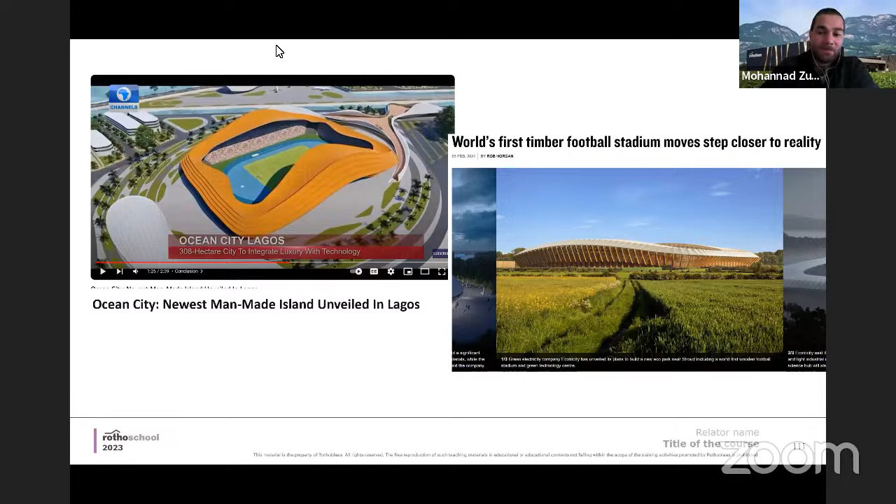No, there is also maintaining it, which comes after. They don't always consider maintenance during construction. As we see in the fish market, maintaining a steel structure over water is much more costly than maintaining glulam over water, for example. Well, we always say more wood, less CO2, and thank you so much for this presentation. Thank you.

Thank you so very much, Engineer Mohannad Zugaya. That was so interesting, and good to know that projects in Nigeria are already considering using mass timber. Thank you so much. We will be having questions for you later in the presentation, and I hope we'll have enough time to take all the questions.

We will quickly move on to our next presenter. He is Dr. Schalk Grobbelaar, a senior lecturer with the Department of Engineering and Technology Management at the University of Pretoria in South Africa. Dr. Grobbelaar specializes in technology, innovation, and risk management. Before joining the university in 2020, he spent 13 years in industry, 10 of which were at York Timbers. He currently chairs the York Timbers chair in wood structural engineering for the sustainable built environment and African bioeconomy at the University of Pretoria.

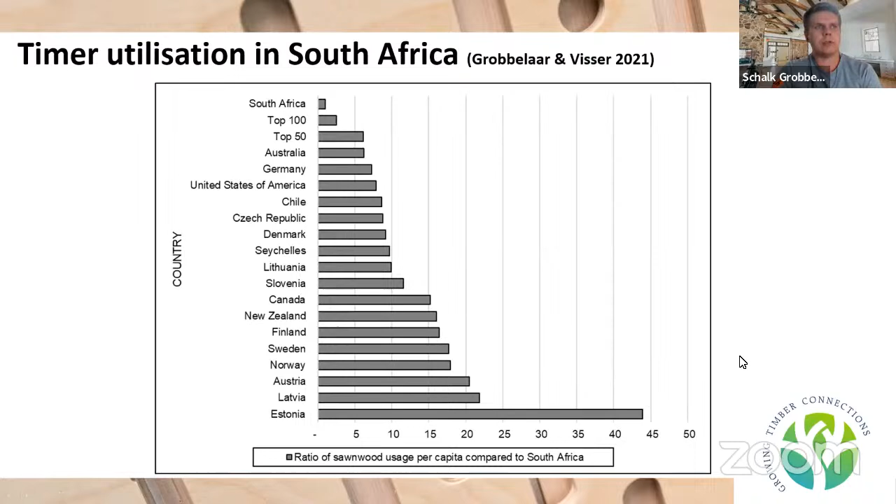I'd like to start with this slide, based on research we've done comparing wood utilization in South Africa to other countries. We calculated the ratio of sawn wood usage per capita for various countries, compared to South Africa as the base case of 1 cubic meter per person. For example, Canada uses almost 15 times as much timber per person as South Africa, and that's quite common across Europe, Australasia, and the USA. Our objective is to increase this graph so that wood utilization in South Africa increases. That's among what we want to achieve.

In short, the objective is to stimulate the development of a sustainable mass engineered timber construction industry in South Africa and the African continent, based on advanced engineered wood products from locally grown forest plantations. This is included in the memorandum of understanding between the University of Pretoria and York Timbers. When this was developed in 2020, we already identified that we want to play a bigger role in Africa as a whole, while considering local context, especially the locally grown resource.

This briefly shows the two programs I'm involved with. The first is the York Timbers Chair at the University of Pretoria, which we've also started incorporating SAFCOL and Merensky into. The second is the DTIC feasibility study that I'm leading. Because the objectives of the two programs are very similar, there's overlap between them. In this presentation, I won't specify which action is associated with which program, since many actions are supported by both.

Moving on to the approach we've taken, one key concept we've adopted is open innovation. Historically, there was a strong idea that if you wanted to develop new innovations in an organization, you should focus on internal capacity, for example internal researchers and internally acquired equipment. But in 2003, Chesbrough developed this open innovation approach, arguing that the best people to innovate in your industry or organization are not necessarily employed by your organization.

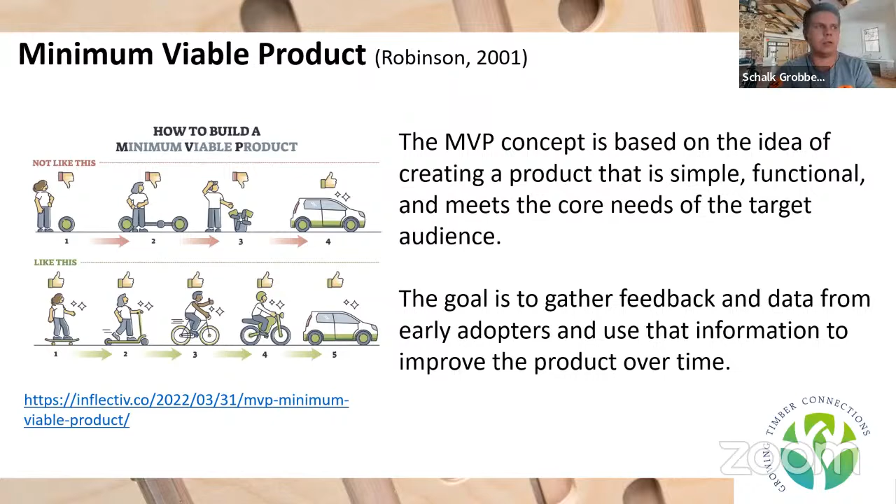Another model that we considered is the 70-20-10 model, developed by Jennings in 2013. He argued that 70% of what we learn is based on practical experience, 20% is based on what we learn from our social networks, in other words our friends, and only 10% is what we learn through structured courses and programs. Taking this into consideration, we realized that if we want to promote timber construction, we would have to incorporate practical training courses for the students or other parties.

We also feel very strong on the application of frugal innovation. Frugal innovation is a concept which focuses on the bottom of the pyramid, or the developing nations in the world, and how to adopt innovations in these countries. The idea is that you focus on simplicity, affordability, and functionality. Historically, the idea was to copy and paste what is available in the developed world. But if you take a frugal innovation approach, it's very important to consider the local context, keep the local people involved in the development process, and also consider what are the real critical parts of this innovation and focus on that. That will hopefully improve innovation and adoption in those countries.

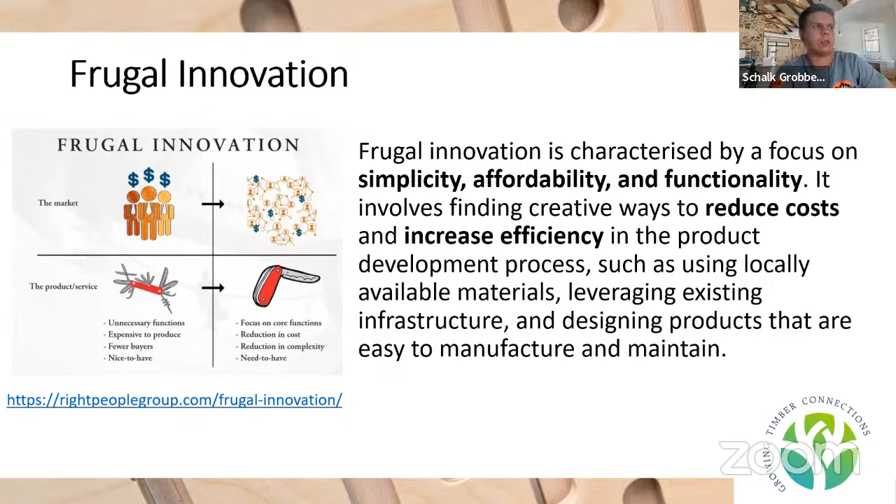An example of frugal innovation and open innovation is the WikiHouse concept. I strongly recommend that if you're not familiar with this approach, you go read about it a bit. We are, for example, very keen on testing similar concepts in South Africa.

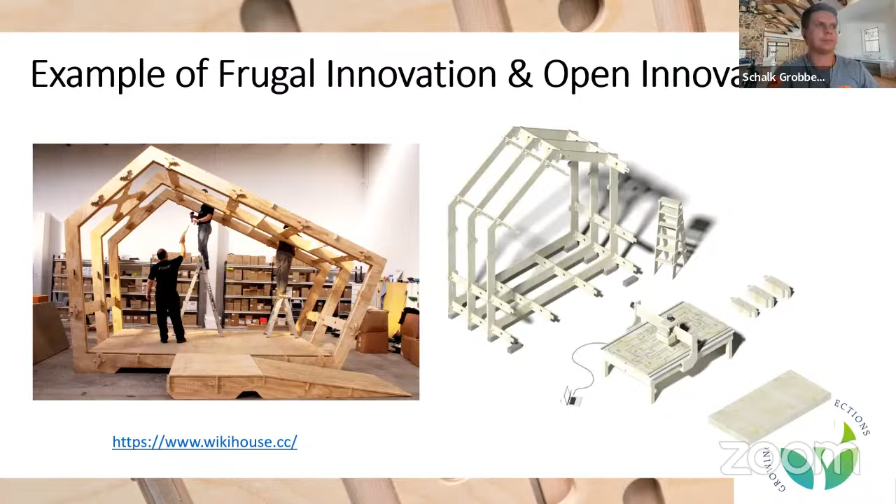The other theory that we felt strong on adopting is what's called the diffusion of innovations. Whenever we look at how we want to promote timber construction in South Africa, we benchmark it against the assumptions in this theory. One of the assumptions is that the adoption of a new innovation is much more a social process than a technical process. So if we want to promote timber construction in South Africa, we need to look at what are the social aspects that influence adoption, and not just the technical aspects.

We also need to look at how networks work, because people are strongly influenced by specific agents in a network. If we can identify who those influential people or companies are, and we can convince them to use timber, then the likelihood of them influencing their networks increases, and then the whole network can grow.

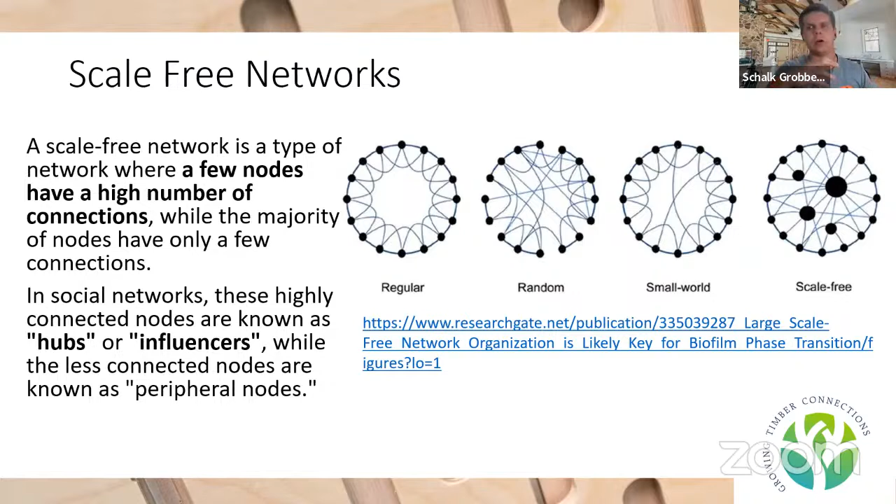We also feel very strong about this FOMO effect, which was coined in 2004, the fear of missing out. So basically what we want to do is illustrate how much fun it is building with timber, and that if you're not part of that, then you're going to miss out. So we try to make it fun to work with timber.

A couple of other approaches we are taking involve the whole idea of success breeding success. So we try to start with small wins, build on these small wins, then promote the wins so that people are aware of what we've achieved, and increase collaboration, in other words get more people to win together with us. We also evaluate effort versus reward. In some cases, some activities are not worthwhile, and then we decide to discontinue them. But the ones that are worthwhile, we continue with them.

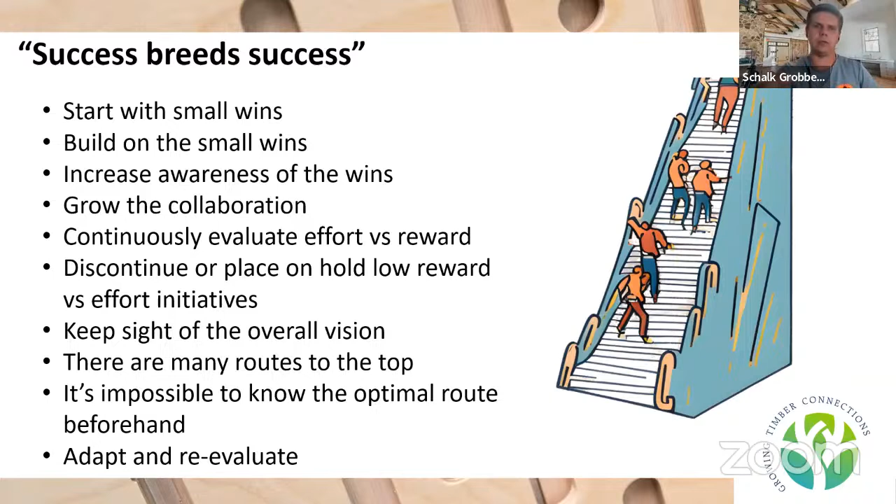We are cognizant of the fact that the future is inherently uncertain, and it's very difficult for us to predict exactly what the best path is to take to promote timber construction. So we're taking an approach of let's test, let's see what happens, reevaluate, and take next steps. So some of the progress that we've made is...

We've been fortunate enough to appoint an intern that's a qualified architect focusing on timber construction at University of Pretoria. We've also appointed a full-time architect focusing only on timber construction there. Mr. Christo van der Hoeven's research will be only on timber construction, and the classes he presents will also be exclusively on timber construction.

We've also gathered a group of civil engineers at the University of Pretoria, which includes Professor Chris Roth, Dr. Sarah Skorpen, and Dr. Johan van der Merwe, who work together as a group to look at how we can educate, which projects we can take on, and which research projects we can take on to promote timber construction.

Many of the architects have also been part of various activities that we've taken on. So we've developed a working group, and each one of these architects is focusing on a specific activity to promote timber construction at University of Pretoria. We've already established 3 working groups at UP, and we are planning to expand that in the near future.

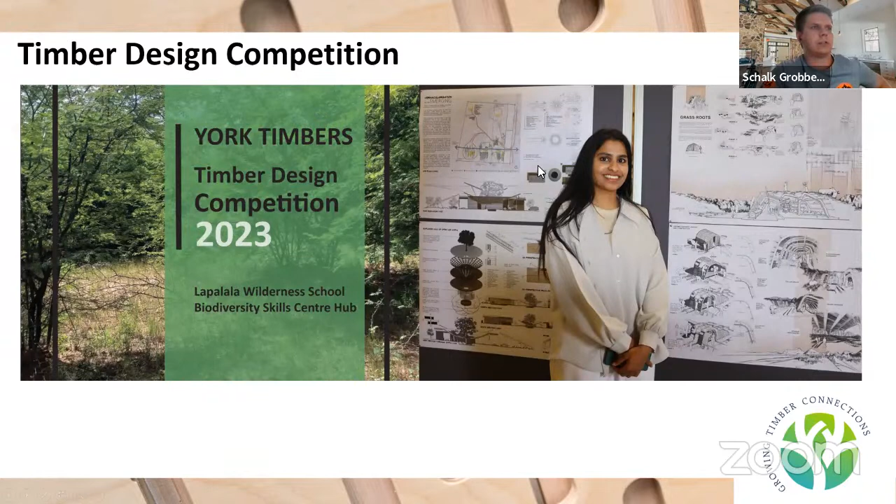We are also starting to do more material tests. For example, we plan to collaborate with Rothoblaas on screw withdrawal tests.

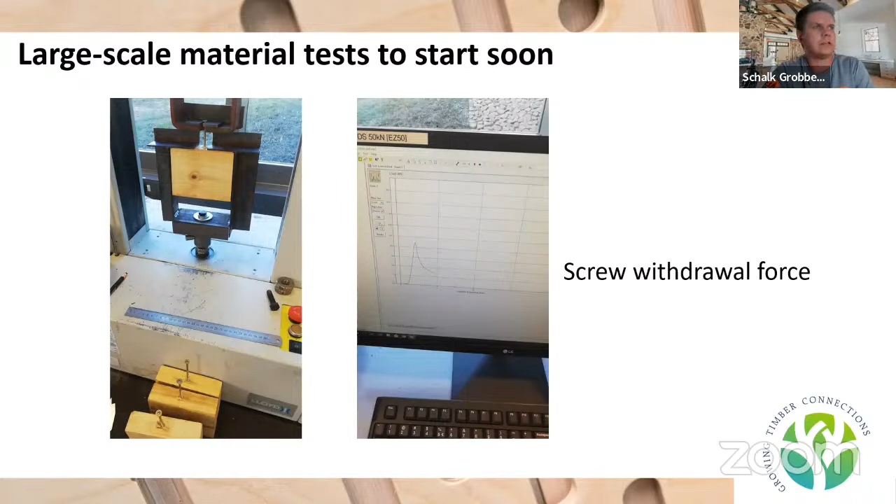There are some bending tests that we've been doing. Then we're also planning to expand the amount of students that we are including in the program. We started off in 2021 or 2022 with, let's say, 1 or 2 students. We grew that to 13 students in 2023, and we had to increase it to 31 research students in 2024.

Then we also hosted the inaugural Timber Construction Conference, which was an industry, academia, and government collaboration. We had more than 200 people attending this conference. We had the Dean of UP's EBIT faculty, some industry partners, and then also the Deputy Minister at the DTIC that presented at the conference. The conference was built up of a research colloquium, a workshop, and a conference and exhibition.